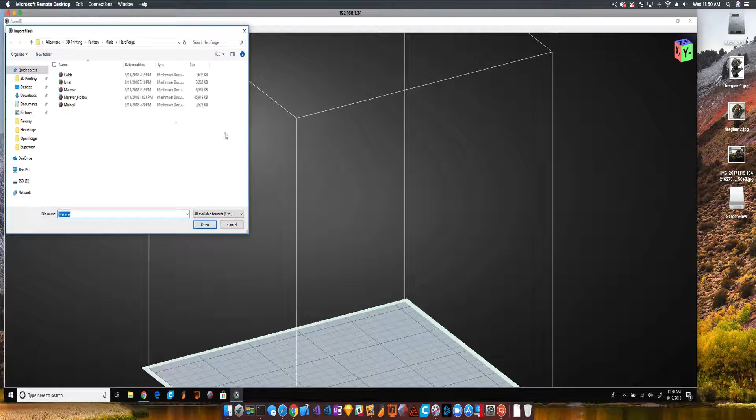So I'm looking at Asura 3D for the Moai SLA printer, and I'm trying to do my first model, set it up so I can print it. I'm walking through the process. I've had a lot of crashes with it, and it just seems like, well, it's still in beta. It's version 1.5 here. Let me show you my process I'm currently doing today.

Right now I tried this in 3 different programs: Mesh Mixer, B9 Creator, and then Kira, and that got me this thing, but it was a lot of work, 3 different programs. So if they can have a program that does it all in one, that'd be kind of nice.

So this is a D&D miniature that I bought from Hero Forge. That's one of my players. I'm a DM, so this is one of the players on my table, and I want to get this printed out. So the very first thing I need to do is look at it.

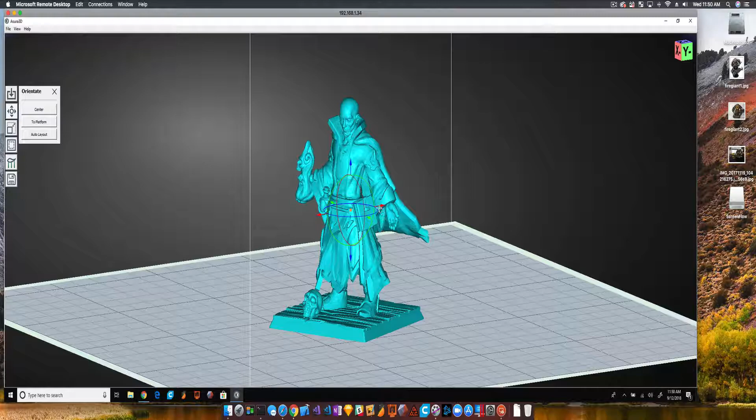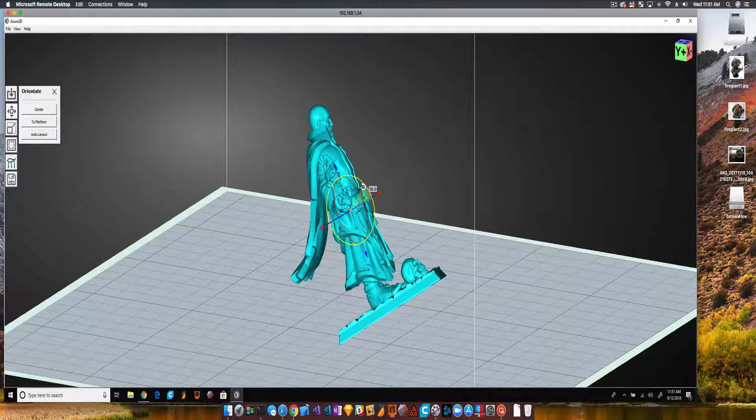I need to rotate it. My understanding on these SLA printers is that the suction forces are a problem, so you want to try to tilt the miniature 30 to 40 degrees. That's what I've seen online, and when you do that, it helps with the forces. Now how I'm doing that is you just click and hold on one of these little lines, depending on what direction it's going in, and then it moves it in that direction.

So you can see here, I want to move this, this would be like almost the x-axis here. Now this would be the z-axis. I need to move it up. You can see here because it was in the build plate there. Otherwise, I assume the gray area is the build plate.

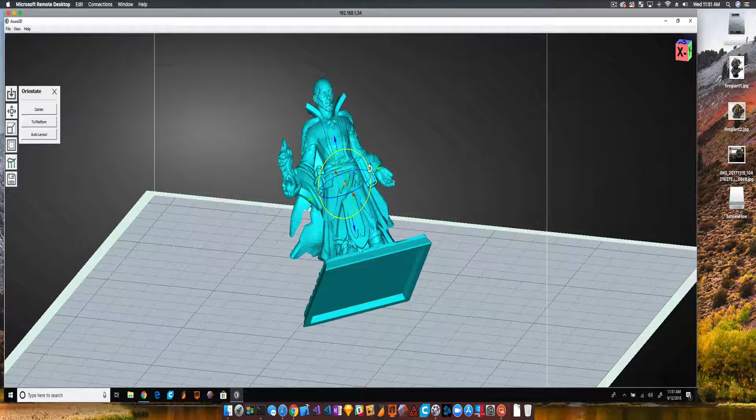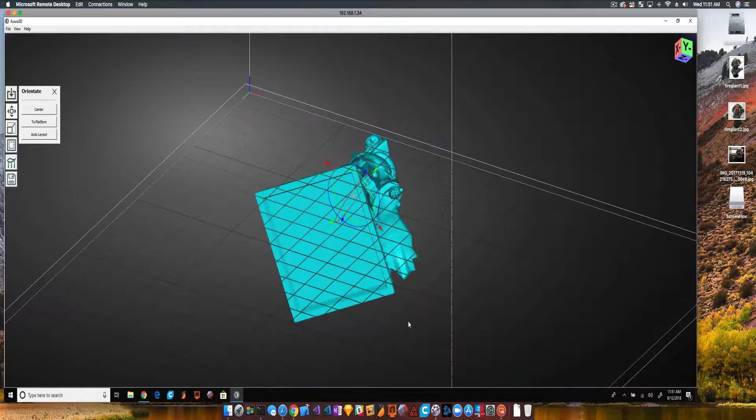Now the problem is I need to rotate this so that I'm trying to get it level with the build plate, the bottom lip right here. Doesn't seem to be very easy. I wish there was an auto-level option, like once you had it like this, it'd say okay, auto level it, so that it's in the best direction for the build plate, because I don't know what that is. And it's really hard to see in this program sometimes. That seems like it's okay, but I can't tell.

It's floating a little bit from space, which you build supports for, right? I don't know if you want it directly sticking on there. I guess I could move it down just a hair. Okay, so that seems pretty close. Let's go ahead and center it again by clicking the center button. And now that's my very first part.

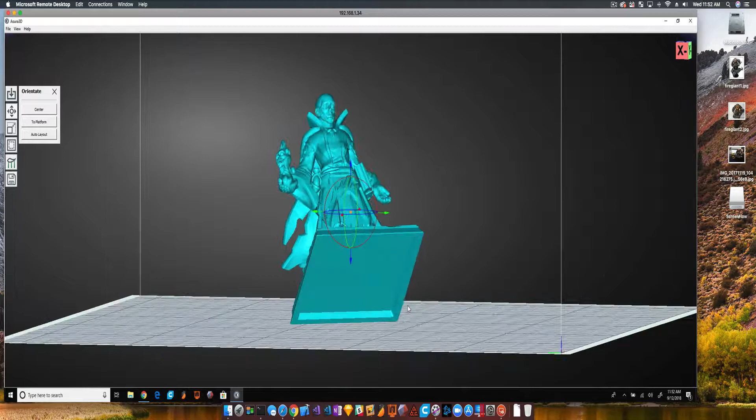So the second part, which is the hard part, is hollowing and putting holes in. So what the heck is hollowing? Well, hollowing, from what I've read, is making it so it uses less resin by basically hollowing out the center of it, because there's no infill like there is on an FDM printer.

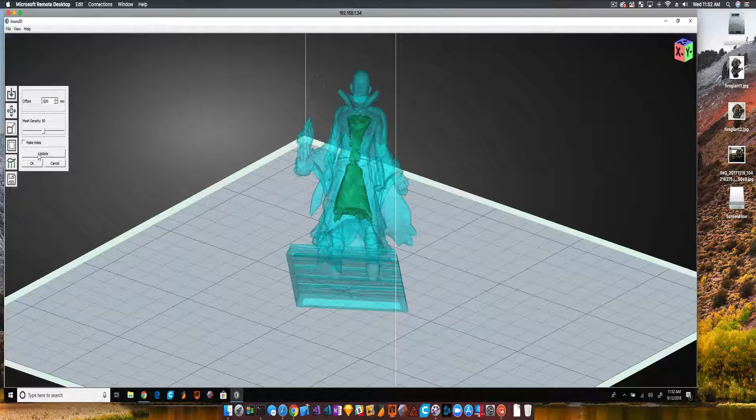So the one thing I don't like is the offset set to 2, and that means if you look at this green area, that's the part that's hollow. It's not enough, the rest of this is all resin. So we want to make that 1 and then do an update. And what we should see is that a lot more of this now is hollowed out, which means I'm saving resin, which is a good thing.

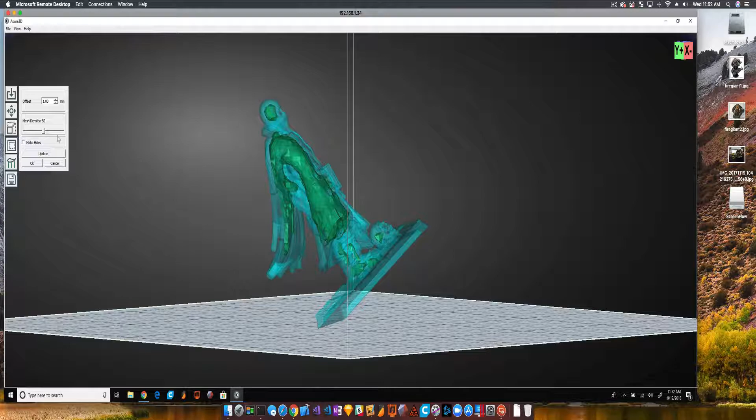Now, the second thing I've been told is that you want to make holes so that the resin can get out of the miniature. It also reduces suction because you have air going through, at least that's what I've heard on YouTube. Now to do that, there's this make holes button. This is where I usually make the holes a little bit smaller because this is such a small miniature, I don't want to mess up over half the miniature.

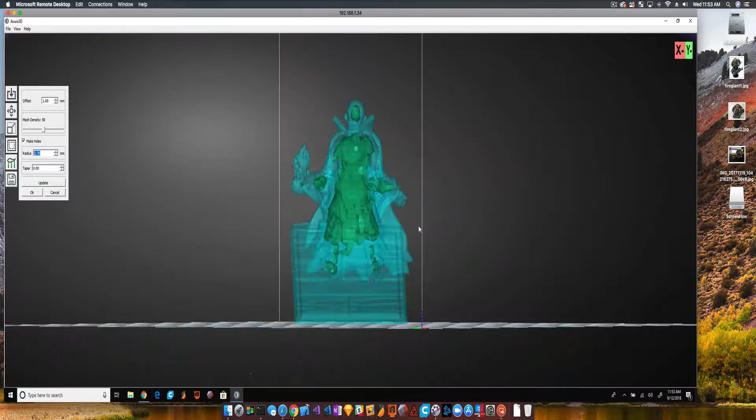The problem I have is finding the angle to see how to put the hole in the spot I want it. I know where I want the hole, man, I've got this thing completely tipped upside down here. All right, so I want the hole where the feet are underneath the base, right? Because that's hidden, I can just put some clay or something else in there to fill that up.

Even GW's little green goo, I could basically fill that and nobody would ever see it. So that seems like it makes sense. So I've just learned that

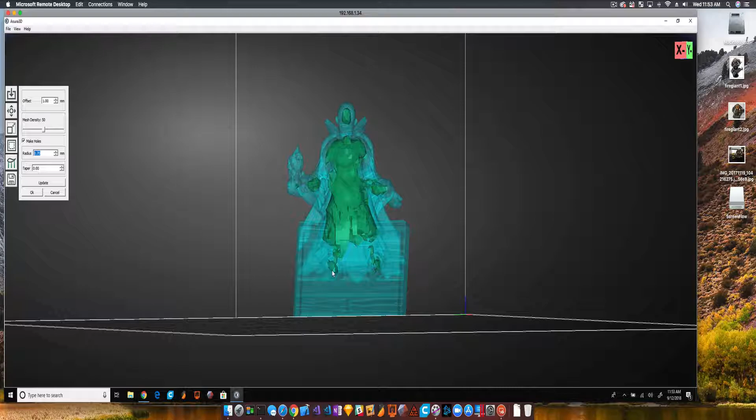To put a hole in, you just click here, right? And then that's going through the feet, as you can kind of see here. Now, I wanted it more towards the base.

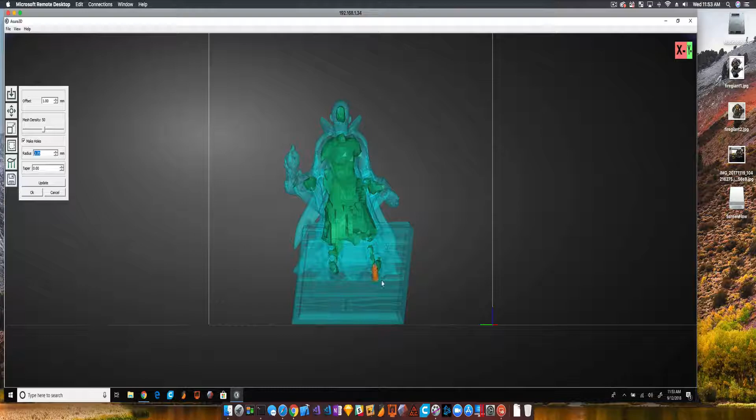Now, how you get rid of these is you right-click on them, which was not intuitive to me at first. Really, I want it right here more on the base, but I can't tell from the angle. See, now that's not the base either of the foot. So the very first problem is finding the right angle to even click to get it, now that looks closer to what I wanted. But finding the right angle is really hard in this.

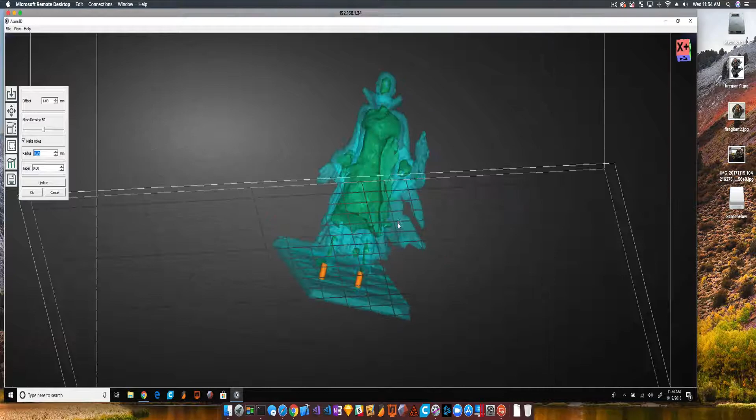Now, the second one I wanted was really at this wizard's butt, and the reason why is him behind the cape. I feel that would be an easy place to hide a hole, to get some drainage out from the entire miniature. Now, of course, getting the angle to get the hole in the way that I want it has been the trick. I've done this 4 or 5 times, and it hasn't been very great.

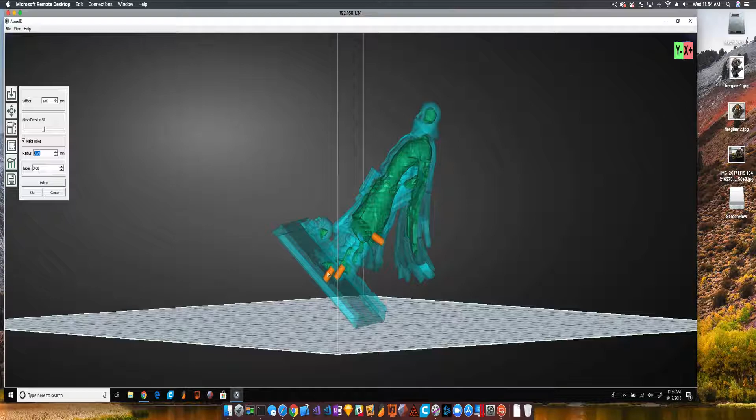Now, you can see here, that looks actually pretty good. I think if we generate out, you can see the green area is there, and I'm assuming that's where you kind of want the drain hole, right? Because you're hoping that more of this resin will drip out up here. It should, hopefully, because it prints upside down, it's going to print this first and then print this last. Hanging upside down, you would think that this angle, that it would drip down and come through here, then through here. I don't know, but I'm about to find out.

Now, I've seen people that put drain holes up here for, once again, for airflow. It's like a straw, right? You have to put something at the bottom and the top.

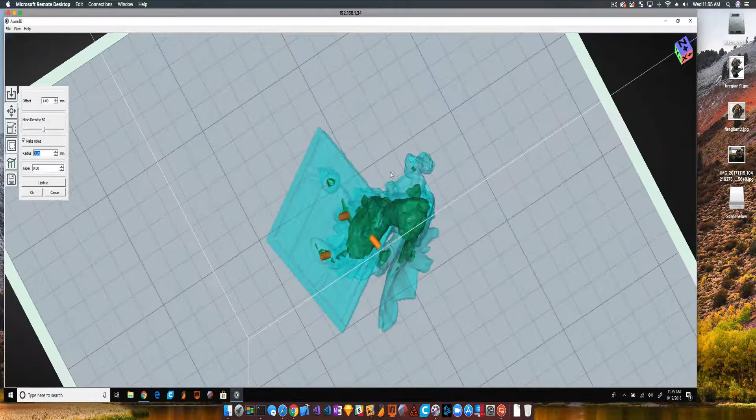The problem is I don't want to put it anywhere on his head. Now, what would be really nice is somehow if I could get it behind the last part of this cape here. I've tried several times clicking in there and getting it, but the model's shape is really weird, and getting the angle for the program to see that. I really kind of want this hole between this cape and the body here, but it's been very hard. I have not been able to do it, but let's go ahead and just continue on with this to show where I'm having problems.

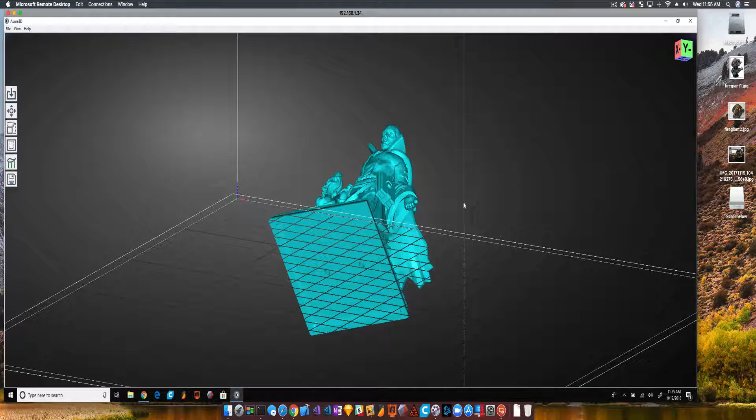So I'm going to click OK. What we should know now is that there are 2 holes in the bottom, which is what we were looking for, and 1 hole right here, which once again I can just fill up. I don't think that that's a big issue.

Okay, so I've got my model rotated, I've got holes, so the last thing and the hardest thing is supports. Supports are needed for printing. And so what I've been having problems with, one, let me save this guy to start out with.

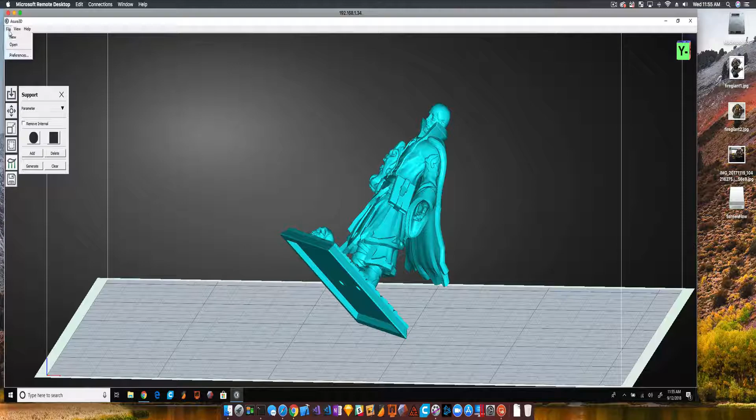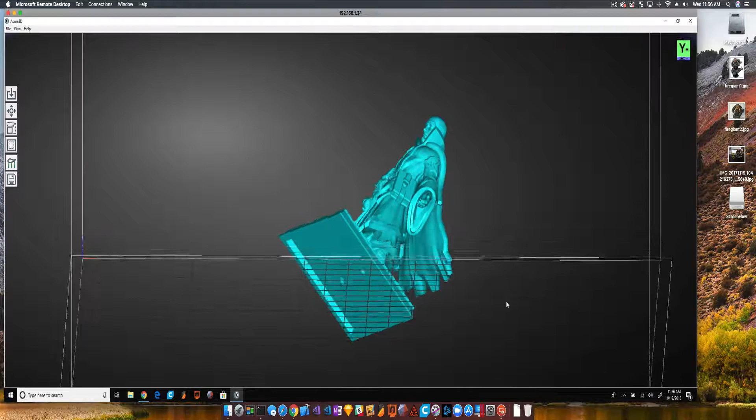Let's go file, save, the little save icon here, because what I don't want to do is lose this, because this looks pretty good. So let's go to Fantasy, Hero Forge, Minis, and then Hero Forge. And then we're going to say this is Marvar Hollow, and I do want to replace it, so that at least I have it here. So save and save often, because this thing has been crashing on me quite a bit.

So that's not good. So I'm going to click the support button again, and you can see here, I've got 2 options. So one I can generate. Now, these little buttons here tell it what kind of base it's going to generate based on. So this means that it's going to make a flat base, almost like, what's it called in FDM? Not a brim, like a skirt or a brim, basically, where it just makes a flat surface and all the supports will connect to it. This makes independent little tiny surfaces for each one of the supports to connect to. And this doesn't do anything, I guess.

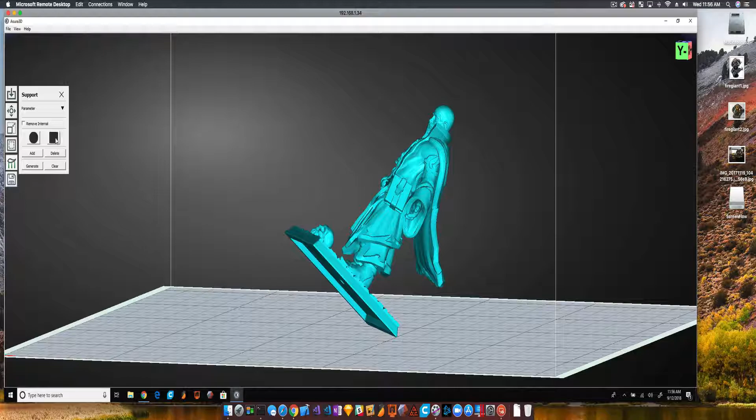If I were to click this and say generate, you'll see that here they are, and they've made all their little tiny bases. Now, the one thing I thought was weird is that some of these supports, like here, I'm not sure if this is really the best support system. You can see this one goes right through the cape.

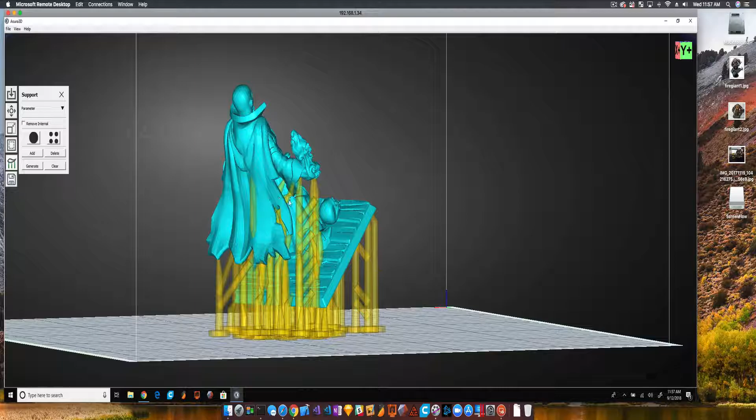It seems weird to me. I would have put a support on the head, for example. So I'm not 100% sure that the supports this generated are the best for this model. I could be wrong. Now I'm going to clear and go to the big plate one and generate.

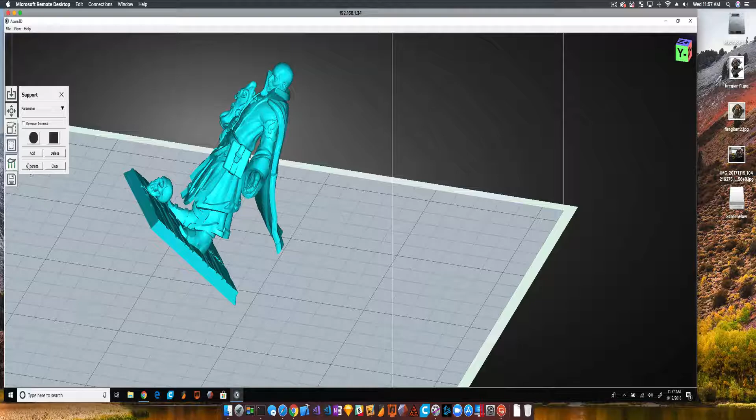You can see that the supports are just about the same. The only difference is we have this big plate building now that all these supports go to, and that's for suction reasons. I'm assuming they're also cross-linking, which is good because it gives more strength to the supports.

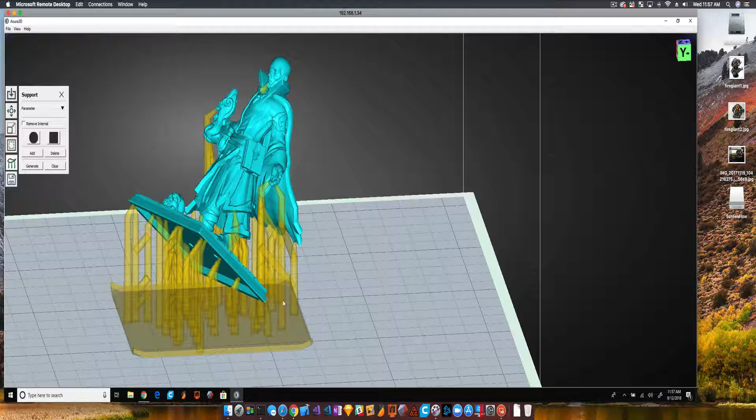Now these are 2 options to do. But if you wanted to try to just build your own, maybe go with less supports because you think you could do it, you can add your own supports in. That's what I've been looking to try to figure out how to do.

So for manual supports, you can click this add button and this plus sign comes up. Now what you're supposed to be able to do is just click somewhere, but that doesn't do anything for me, and then the program crashes. That's kind of where I've been right now.

So I'm just trying to figure out how do you add supports in, if you want to do them manually versus the automagic way, which I'm not 100% convinced about.

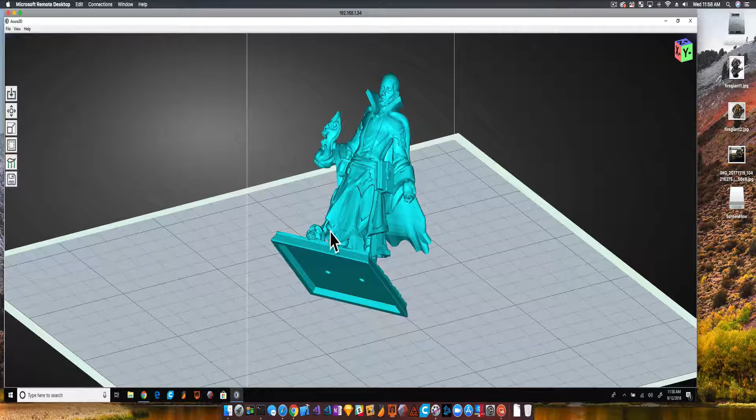All right, what I don't want to do is, one, waste resin, but two, then print this guy and find out that he's completely useless.

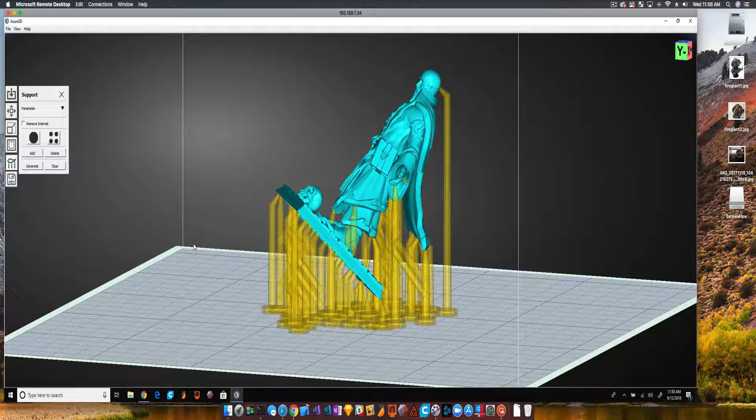I guess I want to try printing it with this generated one, and I'm guessing — based on suction, I don't know if this one's better or the other one's better. These things seem like they're all over the place. I have seen several people post on Facebook that make it look like that's a terrible thing.

So let's just post this and generate. Because the thing that happens is the suction pulls the whole thing off. That's some of the posts I've seen, and I don't want that to happen.

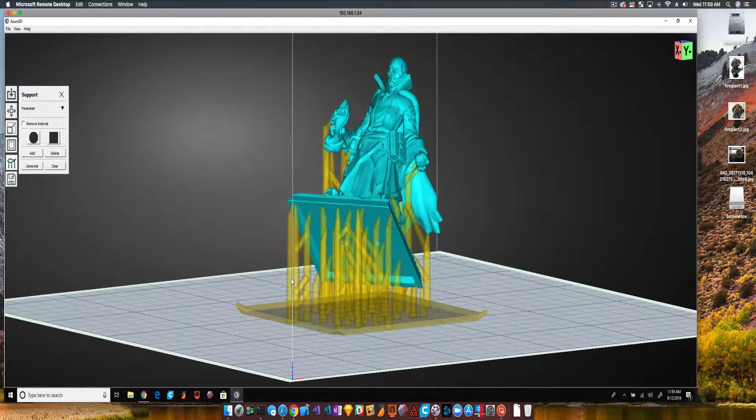But this is my pretty cool mini, so I'm going to try this to see what happens. But manual supports don't seem to be working for me, so I'll look in the post and see if somebody can explain why that's happening.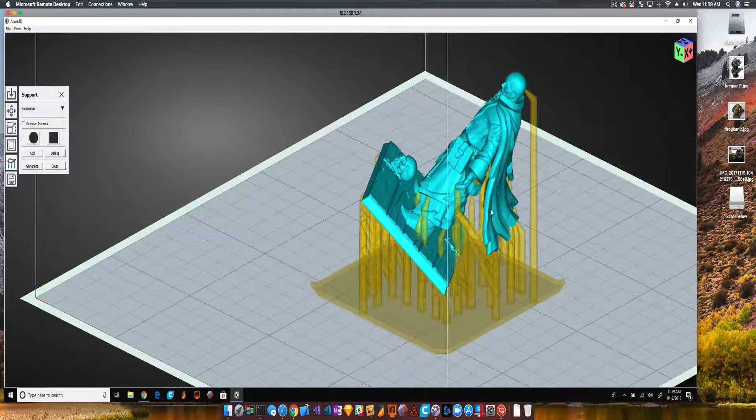Now, I bought it like 9 months ago and didn't put it together. So I'm just now finally — I moved, and so there was a reason for that. Now I've noticed this, though.

This time when I did the supports, there's none in the cape, and the head now has a support, which is the way I thought it should be. Now this is really weird because all I did was reopen it. I haven't done anything different other than reopen this file, and instantly the supports look different.

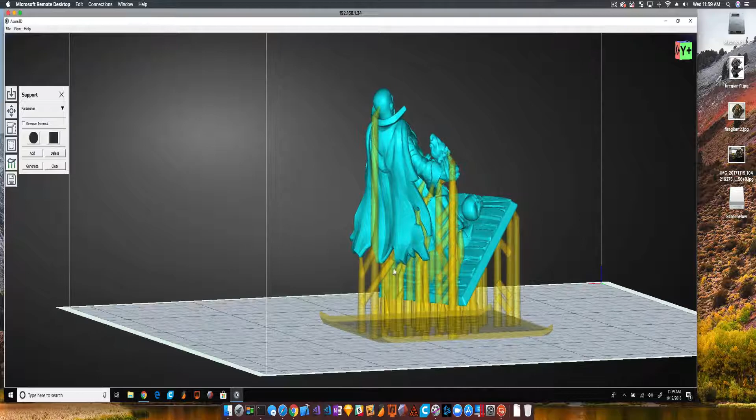And if you go back and look, you'll see there's some right here that I didn't have before, like this one right here, which these 2 I don't think are needed. Some of these are a little bit weirder, but then the support that I would have put in manually on the head here is actually there, but no support here in the middle of the cape.

So, very weird. I think they need some work to make it really good, but I'm going to save this guy out and call it 'Maravar Hollow with support.' And now I do know that the file name is also — what's this called? Support.

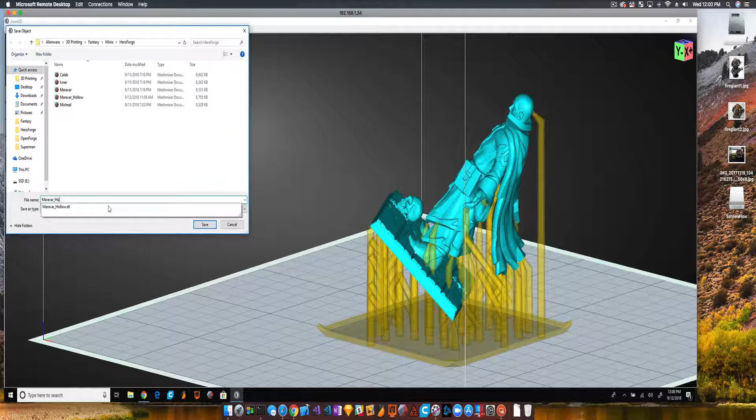The file names have to be under 20 characters, otherwise the printer won't read the file names, which is also kind of, I find weird, but okay.

Well, this is what I got right now. I'm going to try to print this, and I'll probably post back my results. Thanks.